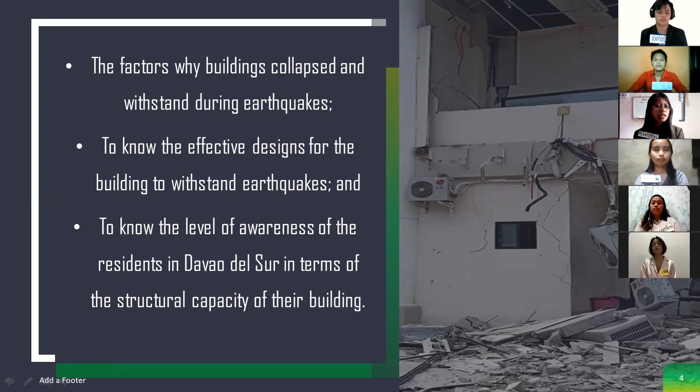And for the statement of the study, specifically, this study sought to answer the profession and location of the random respondents of Davao del Sur, to know the factors that affect the structural integrity of the buildings, to determine the number of building stories and building materials used in their respective houses, and to know the status of the residential buildings after the 2019 consecutive earthquakes. This study also sought to find out the level of awareness of the residents in Davao del Sur in terms of the capacity of their respective houses. Next.

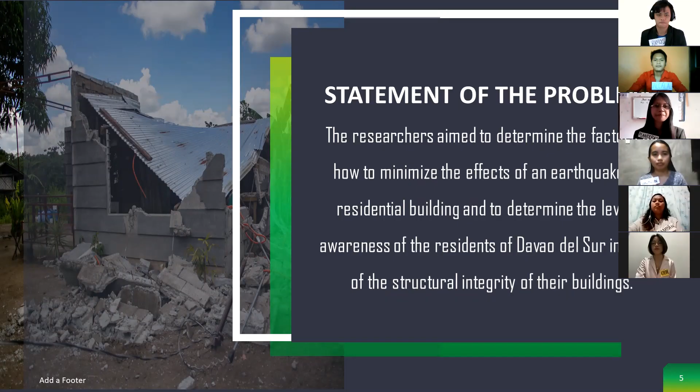Scope and limitation. The study covered the determination of the factors on how to minimize the effect of earthquakes on buildings in Davao del Sur. This also includes the structural requirement, the factors affecting the failure, and the mitigation done to protect the building from earthquake. The respondents were 83 residents who have experienced the 2019 consecutive earthquakes and 20 engineers, both coming from Davao del Sur.

For theoretical framework, this study anchored on the 4 virtues of earthquake-resistant building. According to this theory, there are 4 features that the designer should consider to prevent the building from collapsing. These are the structural configuration, lateral stiffness, lateral strength, and ductility. Next.

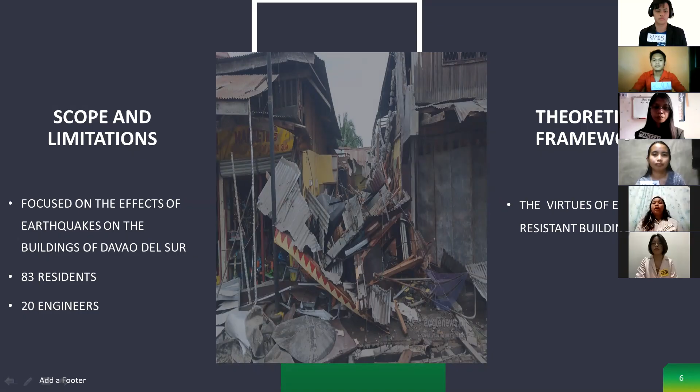The schematic diagram shows the interplay between the independent variables and dependent variables of the study. So for the hypothesis, there is a resident's house profile that has a significant effect on the status of the residential building after the 2019 consecutive earthquake in Davao del Sur. Next.

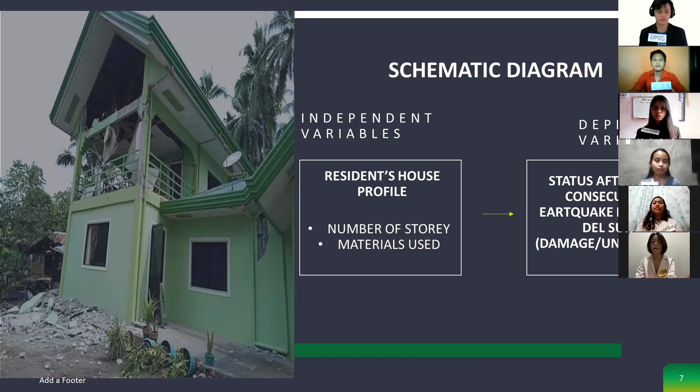Methodology. For source of data, the sample came from the assessing group, specifically civil engineers, contractors, and residents of the province of Davao del Sur, since these respondents are easy to reach and have the capability to track the status of the building and experience of such phenomena. And the experts can also assess our curiosity and investigation about the topic of why structures fail

and withstand earthquakes. Next, for gathering procedure, the questionnaire was in Google Forms since the province is still restricting social gatherings. Thus, face-to-face approach is highly discouraged. Next. For statistical tool, we use frequency and percentage, weighted mean, and correlation analysis. Next.

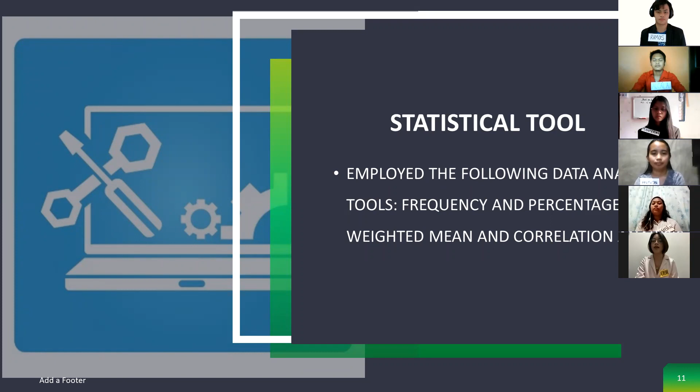For the presentation and analysis of data, for respondents' profile, 80% of the respondents come from the civilian sector. Next. And the most number of respondents is located at Digos City, while the others are in the surrounding areas of Davao del Sur. Next. We have generated two types of data, for engineers and for residents.

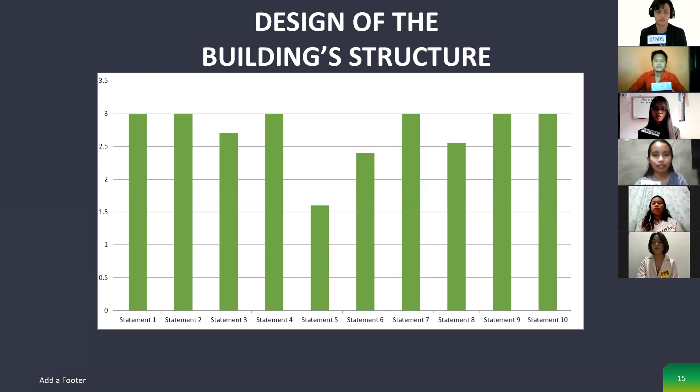For engineers, we include the factors affecting the integrity of the building. The first factor is the design of the building structure. As we can see, 6 out of 10 statements have the same rank, which is concerned with following structural code, identifying existing fault lines, and considering materials to be used, which are believed by our respondents, the engineers, to have a greater impact on damages on the building, and it also supports the claim of Ahzahar 2011 that low quality material leads to building defects and failures.

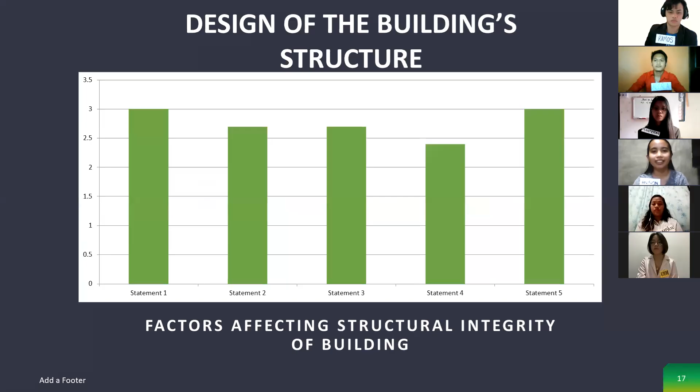And for the second factor, the implementation, as shown in the figure, statements 1 and 5 have the same rank, which suggests that frequent supervision and strict implementation do really affect the integrity of the building. Next. For residents' data, most of the residents are living in a single-story building, and the materials used in constructing their houses are concrete hollow blocks. Next.

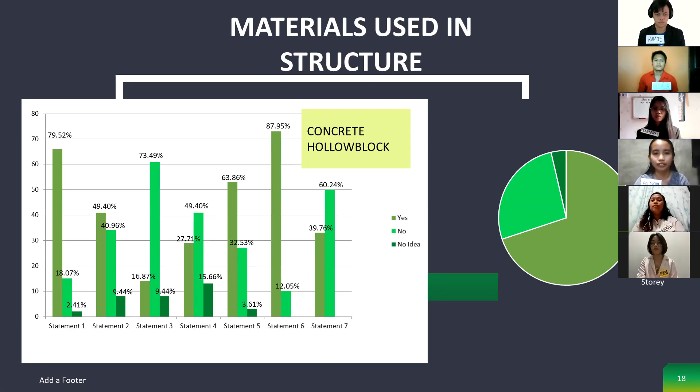For the 2019 consecutive earthquake, the status of structure, 61.45% of the respondents responded that they have seen damages on the residential areas. Next, and among those damages are wall cracks and column cracks.

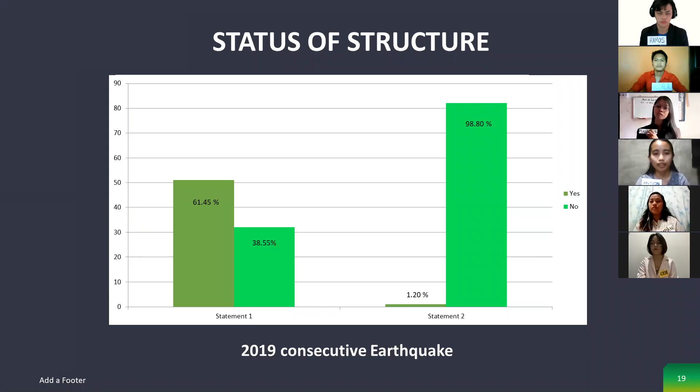And two among of the 83 respondents claimed that the residential building had collapsed due to weak beams and weak columns. Next.

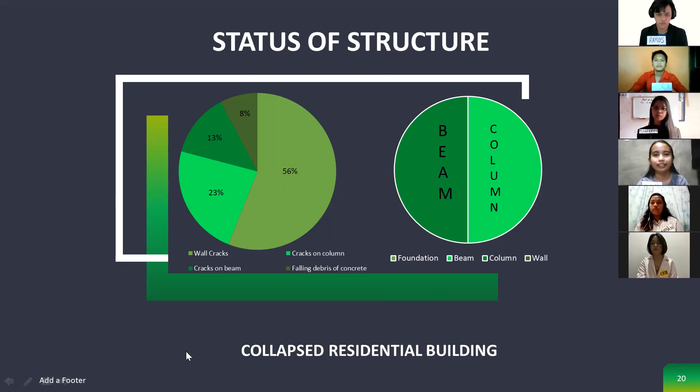On the level of awareness of the residents on the structural integrity of the building, it is shown that 20.48% of them is aware of the maximum resistant capacity of their building to withstand earthquake, while others do not know and have no idea about their residential building. And for the attitude towards constructing a building, 91.57% residents give more importance to the design of the structure and are willing to pay whatever it takes to just ensure the stability and safety of the building.

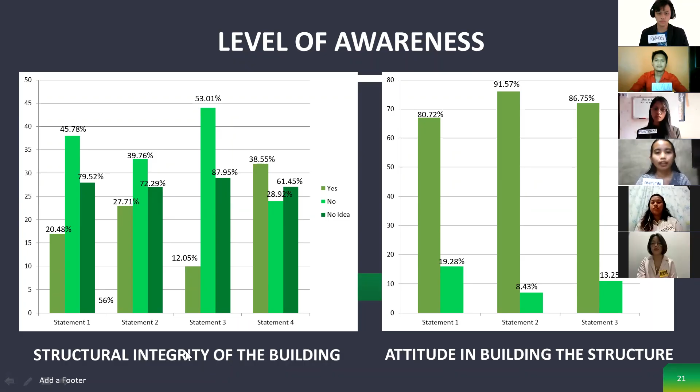Next, and for the correlational, we use Pearson correlation to correlate the number of stories and material used to the status of structure after 2019 earthquake. And we found out that the number of stories doesn't have a significant effect on the status of the structure, while material used in constructing the building does seem to have a significant effect on the status of structure after the 2019 earthquake. Next.

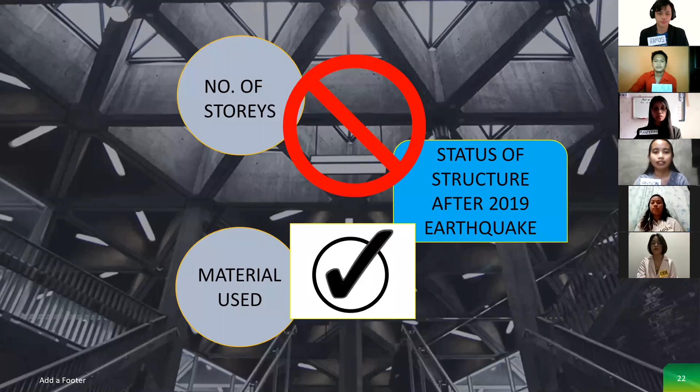Conclusion. Based on our study, we have concluded that in order to minimize the damaging effect of earthquake in a residential building, there are two main factors that need to be considered. First is the design of the structure, and second is the project implementation. For the design of the structure, it is a factor to follow the standard and specification of the Structural Code of the Philippines, as well as to consider the type of materials to be used and consider the physical conditions of the site. And it is also important to know if there is an existing fault line within the vicinity.

And for the implementation phase, we have concluded that it is a factor that the construction plan should be strictly adhered, and conducting a supervision before and after a specific task is done. The factors that have been accumulated in our study is supported by our theory of four virtues of earthquake-resistant buildings, as stated earlier, which states that the designers should give importance to the four features such as structural configuration, lateral stiffness, lateral strength, and ductility for the building to become earthquake-resistant. Next.

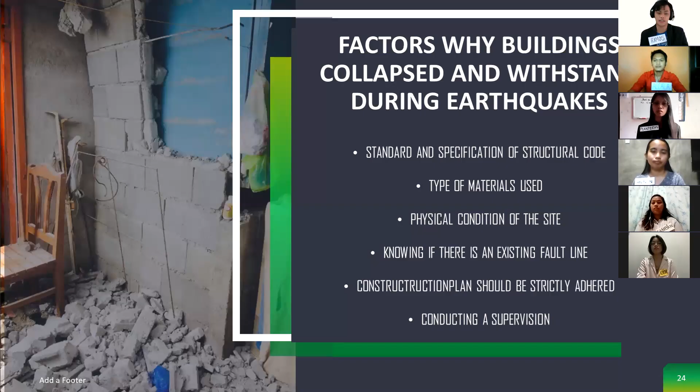We also have concluded that the type of material used has an effect on the status of the residential building after the 2019 consecutive earthquake, specifically on the type of wall used. As shown in the table, the majority of residents who claim that their property has been damaged use concrete hollow blocks, whereas those who claim their buildings has not been affected or damaged use lightweight materials in their walls. Thus, we have seen from this data that utilizing light materials in wall construction is less prone to damage than using concrete hollow blocks.

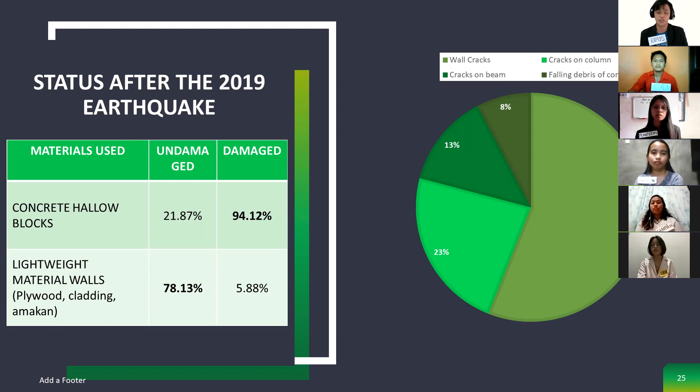Furthermore, from the 51 residents that responded that their houses were damaged from the consecutive 2019 earthquakes, 56% of them have stated that their walls were damaged or have cracks on their walls, as shown in the pie graph. Next.

Similarly, according to the post-assessment study of the 2013 magnitude 7.2 earthquake in Bohol, Philippines that was conducted by Nagit et al., they have also observed that wall cracks is the most evident damage, and it is due to the lack of steel reinforcement, non-staggered layering of block, and or weak structural framing. Next.

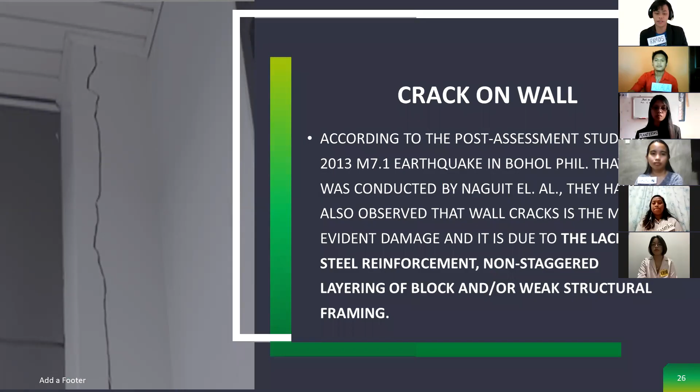Moreover, we have concluded that the residents are aware about the type of beams, columns, and walls that their house used, but a big percent of the participants answer that they do not have an idea on what is the maximum intensity of earthquake that their residential building can withstand. And also, the residents have no idea whether there may be an existing fault line in their vicinity or not. Thus, we have concluded that the level of awareness of the residents in terms of earthquake building is low. Next.

Recommendations. Based on our findings and conclusion, our recommendations are for the civil engineers or contractors: critical planning and integrating all the design parameters and good construction practices. So in planning, they should integrate it in accordance with the NSCP or the National Structural Code of the Philippines, and good construction practices like strict supervision during the building construction, and also using a good construction methodology.

For the LGU, initiate trainings and seminars on earthquake preparedness, and then strict inspection and assessment on buildings to ensure that buildings are safe for the humans and for the residents. So they must hire professionals and experts to ensure the structural integrity of their houses or buildings, and to know what materials need to be used in your houses.